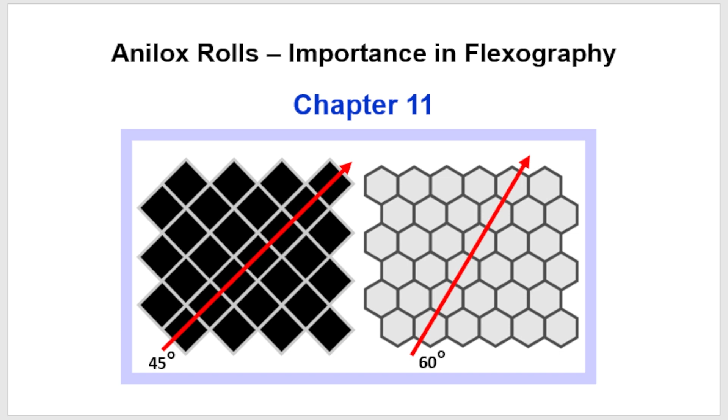Today we are going to study the same chapter, Anilox Rolls Importance in Flexography, and we start now. Anilox Roll Importance in Flexography, chapter number 11. So, ink transfer in process printing.

It is not only the job of the Anilox roll to transfer volume, but also to guarantee a certain homogeneity of ink transfer. Color strength must be achieved, but over-inking of the small highlight is a great danger and requires a precise adjustment. Here is the figure showing that.

In the above chart, you see a dot and Anilox with a relatively fine screen count. As you may notice, there is rather regular and uniform inking. In this second case, in opposition to the same plate dot, there is now an Anilox roller with a coarser screen count. The dot is still supported by the cell wall and will be wetted by a maximum amount of ink.

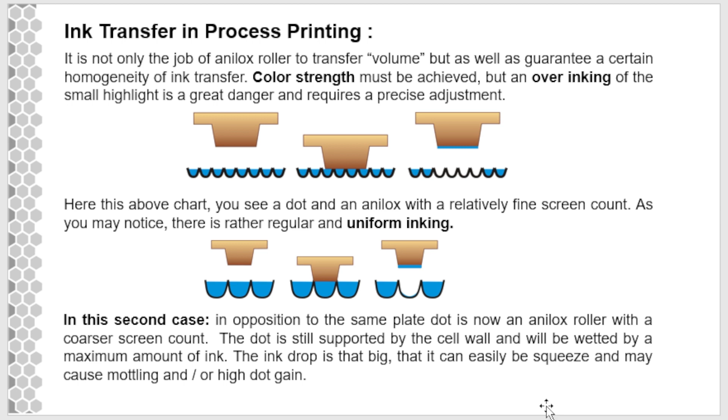The ink drop is so big that it can easily be squeezed and may cause mottling and/or higher dot gain. Ink transfer in process printing. In the third case, the screen count of the roller is too coarse. The plate dot will dip into the cell and be covered with ink. Because of this, satisfying printing cannot be guaranteed any longer.

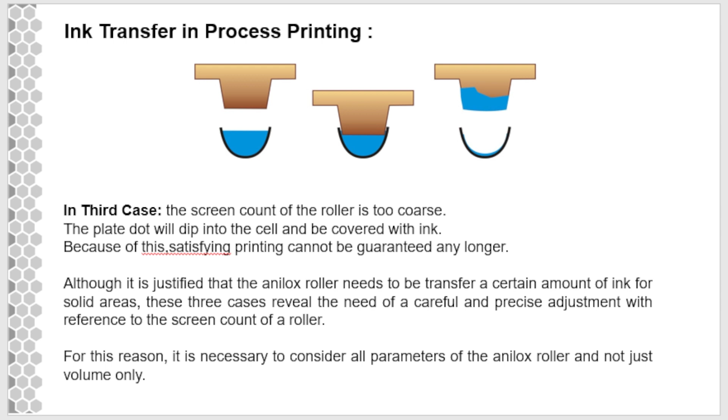Although it is justified that the Anilox roller needs to transfer a certain amount of ink for solid areas, these three cases reveal the need for a careful and precise adjustment with reference to the screen count of a roller. For this reason, it is necessary to consider all parameters of the Anilox roller and not just volume only.

These three cases can be easily noticed in vignettes. If you observe carefully here, the graduation of the printing image, the size of the plate dot in opposition to the Anilox cell opening. The critical part is the highlight area in which the relatively small dots are applied. If an exact adjustment between the printer, his set of Anilox rollers and the reproduction house does not take place in advance, a lot of printing problems may occur.

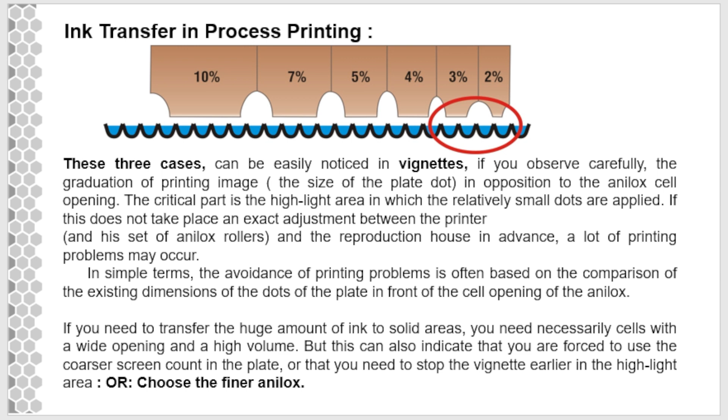In simple terms, the avoidance of printing problems is often based on the comparison of the existing dimension of the dots of the plate in front of the cell opening of the Anilox. If you need to transfer a huge amount of ink to solid areas, you necessarily need cells with a wide opening and high volume. But this can also indicate that you are forced to use a coarser screen count in the plate, or that you need to stop the vignette earlier in the highlight area, or choose a finer Anilox roller.

The Anilox selection chart. Here I am going to show you the Anilox roll screen in lines per inch and lines per centimeter, and the optimum BCM, billion cubic microns. This is the optimum and maximum. It shows the volume, and now the comparison with the plate screen you need and the minimum dot you want to print: 1%, 2%, 3%, 5%. You have to decide. Accordingly, you have to choose the Anilox roller volume and the plate screen LPI.

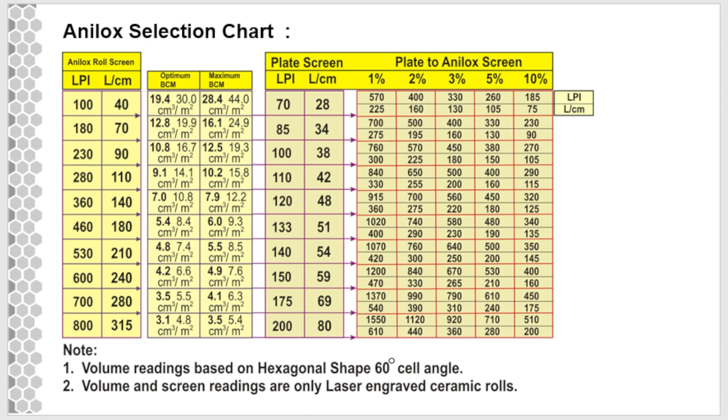For instance, just as an example, a 360 LPI Anilox screen with a volume of 7 cubic centimeters per meter square, maximum 7.9. Okay, this is optimum, and you choose a 120 lines per inch plate screen, 48 lines per centimeter. What do you want to print? If you want to print the 1% dot, then you have to choose 915 LPI; 560 for 3%; for 5%, 180, and similarly 125. All right. So all these readings are based on the hexagonal shape, 60-degree cell angle. Volume and screen readings are only for laser engraved ceramic rollers.

The word moire stands for a special disturbing pattern caused by certain inappropriate positions of angles to one another. The cause of moire is indeed only the wrong position of the various angles, but unfortunately it has become established to call various kinds of disturbing patterns a moire. Besides the angle, these patterns can have diverse causes, such as printing pressure too high, inappropriate mounting, and over-inking. These are the reasons.

With regard to the Anilox roller, we can mention only two reasons for moire which are directly caused by the roller itself. A typical pattern like moire is caused by over-inking of the dots. The plate dot is really crammed full of ink, and at the moment of printing, the ink is squeezed irregularly. The pattern which results from this appears similar to a moire effect. The solution: it can be avoided by trying to print more in the kiss print position and/or selecting an Anilox roller which transfers the ink more homogeneously.

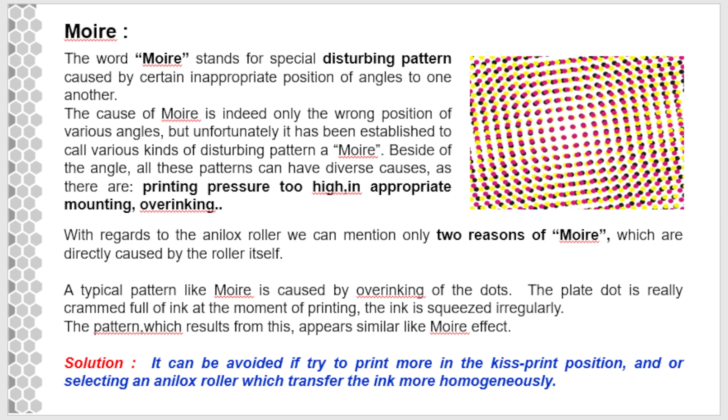Moire: the second cause of the formation of moire is certainly due to the unfavorable positioning of the Anilox engraving angle in relation to the color separation angle. Two aspects are to be seen for this. Very broad land areas of old or worn Anilox rollers support an orientation of dots by which an unfavorable position of angles is clearly transferred.

The ratio between the screen count of the plate and the Anilox screen count is of central importance. A relation of 1:3 should be the minimum. For example, if you want to print a plate dot of 50 lines per centimeter with an Anilox roller of 200 lines per centimeter, you have a ratio of 1:4. Due to this ratio, it is rather unlikely that moire appears from the positioning of the roller angles. As a consequence, we can state that there is no negative effect on your printing results whether you use a 45-degree or 60-degree angle engraved roller.

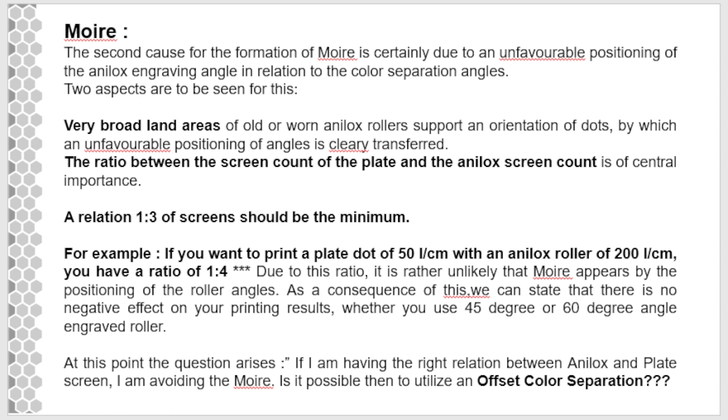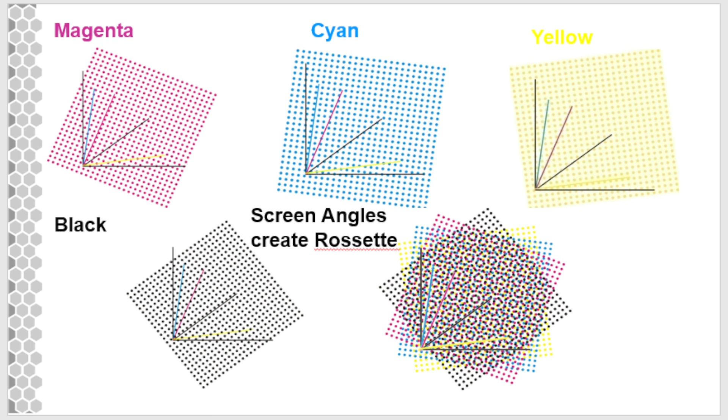The conclusion is, considering the aspect of moire and angle positioning, this is the right conclusion, but do not forget the most significant aspect: the transfer procedure of offset printing is totally different than flexo printing. An offset separation is built up with a totally different dot gain curve. In flexo printing, it becomes difficult to realize the required print quality from this setup.

In flexography, where Anilox rollers are used, screens will often be rotated, usually by 7.5 degrees, to avoid clashing with the pattern of the Anilox roller, which is usually cut at 60 degrees. Other considerations: flexo screen using black, cyan 22.5, black 82.5, magenta 52.5 degrees, and yellow 7.5. In the same sequence, halftone black may be pushed harder if there is black line work.

In the case of a flexo screen using line K, which is black, cyan is 22.5, and here the black is 52.5. All right, magenta 82.5 degrees, and yellow remains the same. So CMYK plus line black also allows you better image control and higher black.

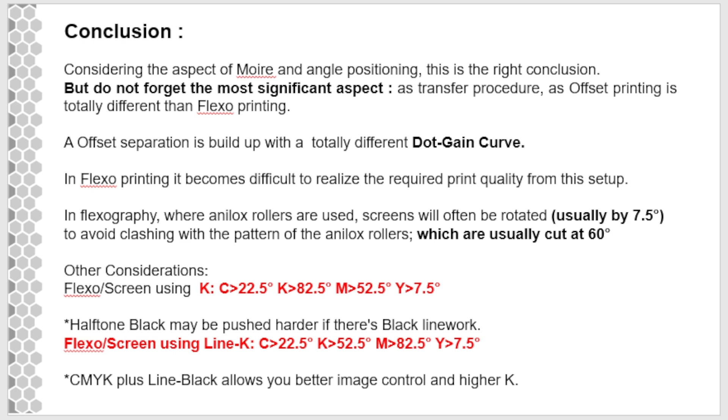Dot gain curve. Evaluation of the dot gain curve is useful in order to study the transfer properties of your press in reference to your plates and underlay setup, the ink and the Anilox roller, etc. Due to this, the dot gain curve is often described as the fingerprint of the press. In order to receive optimized printing results, it is necessary to make a print proof under different production circumstances with the help of a test form.

The analysis of the print is done by a densitometer and provides the reproduction studio with the necessary information for the optimal performance of your printing job. This will help to prove the printing conditions. In this way, you will easily recognize those parameters which are favorable or unfavorable for your printing results. The test forms shall consist of vignettes and various control elements and should be equipped with some bigger solid area elements across the width.

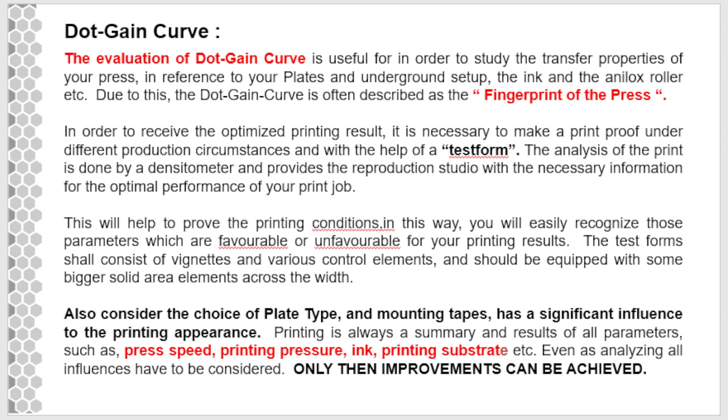Also consider that the choice of the plate type and mounting tapes has a significant influence on the printing appearance. Printing is always a summary and result of all parameters in flexographic printing, such as press, speed, printing pressure, ink, printing substrate, etc. Only by analyzing all influences can improvements be achieved. We will discuss in our upcoming chapters the fingerprinting of the press and how to do the test form test and so on. All right. So we complete here.